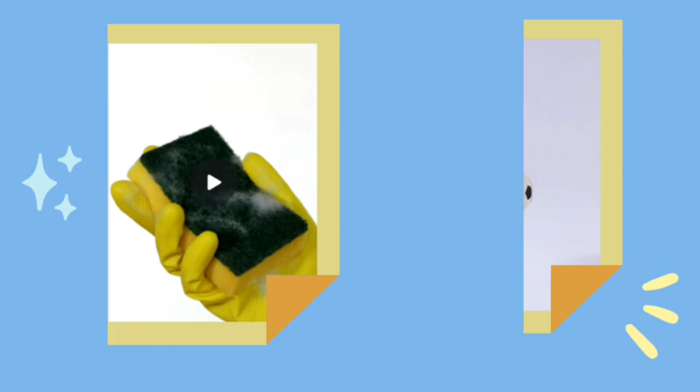Have you ever wondered how some materials can be both soft and strong at the same time? Or how engineers design lightweight structures that can survive a strong impact and still return to their original shape? Imagine this: you fall off a bicycle, your helmet protects you, but after that one crash, it's useless. What if we could create materials that don't just protect us, but also bounce back and can be reused?

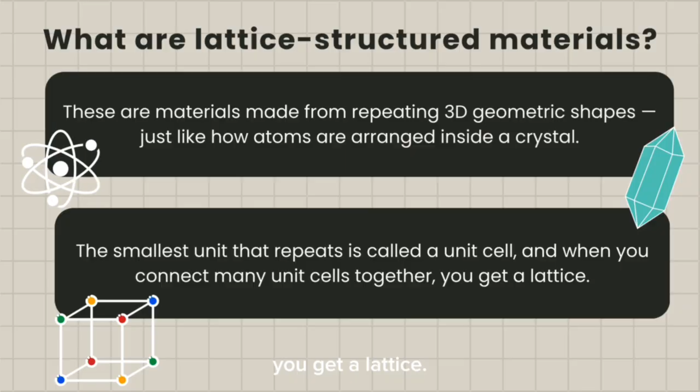So what are lattice-structured materials? These are materials made from repeating 3D geometric shapes, just like how atoms are arranged inside a crystal. The smallest unit that repeats is called a unit cell, and when you connect many unit cells together, you get a lattice. These lattice structures are not only lightweight and strong, but they also have interesting behaviors under stress, especially when heated or compressed.

That's why they are widely used in protective gear, packaging, and aerospace parts. In this study, scientists tested different 3D printed lattice designs made from soft materials to see how well they can absorb impact energy and return to shape after compression. Throughout this video, I will take you through their process, findings, and how this study brings our theory from PHY 535 into the real world.

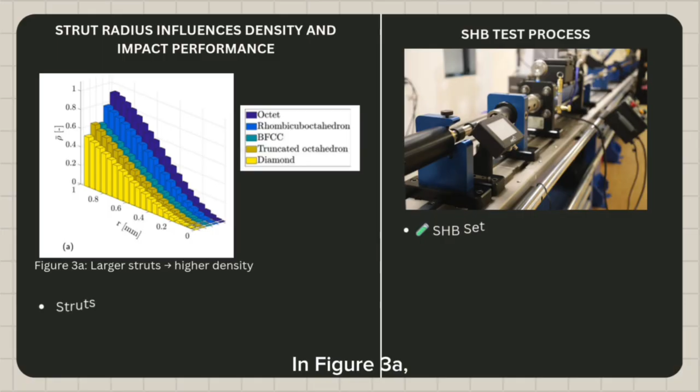The researchers tested 5 different 3D printed lattice designs, each made from a soft TPU-like resin using SLA printing. To compare their strength and energy absorption, they printed each structure in 3 relative densities: 0.2, 0.3, and 0.4. Instead of changing the size of the structure, they adjusted the strut radius, which changes how much material is inside the unit cell. In figure 3a, we can see that as the strut radius increases, the relative density also increases. This allowed the researchers to control material usage while keeping the overall shape the same.

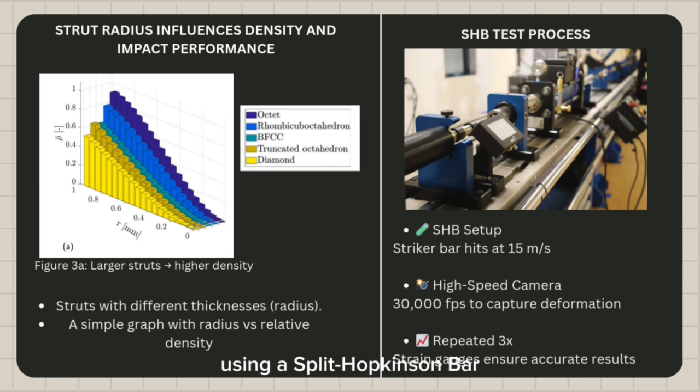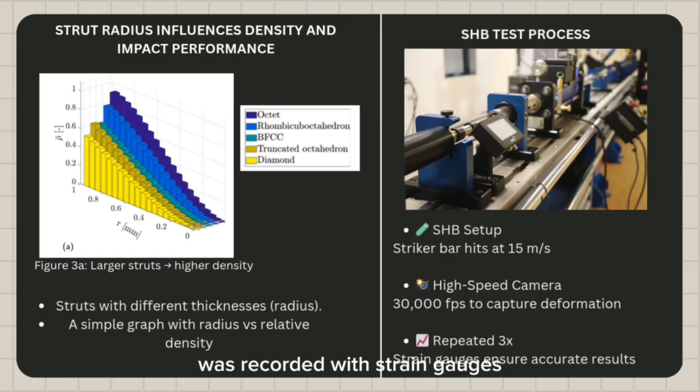To simulate real impact, the printed samples were tested using a split Hopkinson bar, or SHB, setup. The striker bar hit the samples at a speed of 15 meters per second, compressing them up to 80%. The impact response was recorded with strain gauges and a high-speed camera at 30,000 frames per second. Each test was repeated 3 times to ensure consistent results.

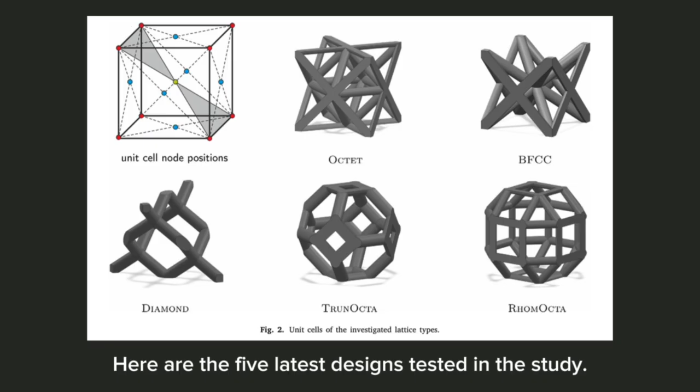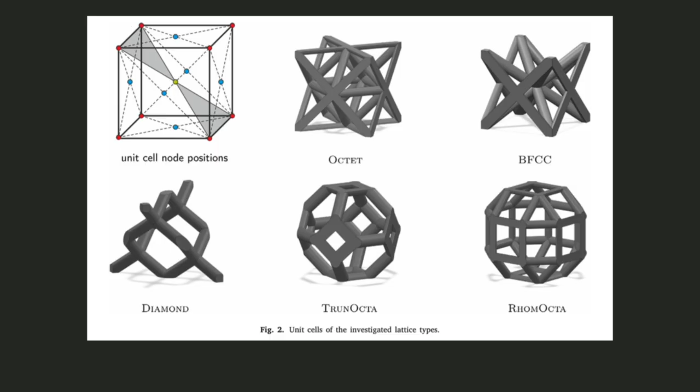Here are the 5 lattice designs tested in the study. All of them are built using 3x3x3 unit cells, and their shapes are inspired by real crystal structures that we learned in PHY 535. For example, the octet is based on an FCC-like structure, while diamond mimics the carbon atom structure in crystals. In figure 2, you can see the unit cells of each design. These repeating units form the full lattice, and their internal geometry plays a major role in how the material behaves under impact. This variety of shapes helps researchers study how different geometries affect strength, flexibility, and energy absorption.

Two key parameters in this study were relative density and the Maxwell number. Relative density, written as ρ, tells us how much material is inside the structure compared to a solid block. The researchers tested all designs at 3 densities, 0.2, 0.3, and 0.4, and controlled it by changing the strut radius, which you can find in table 2.

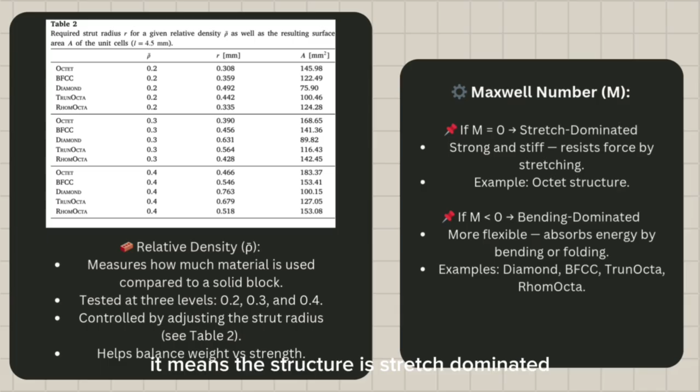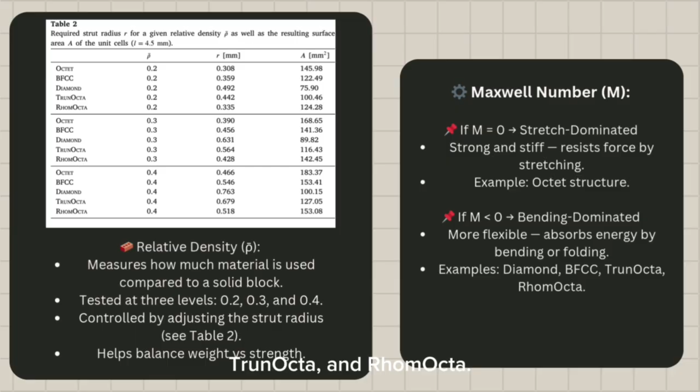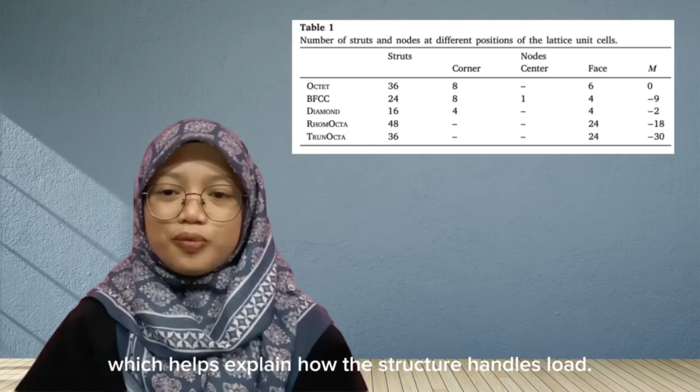The Maxwell number, labeled M, tells us how the structure behaves when force is applied. If M equals 0, it means the structure is stretch dominated, like the octet. But if M is less than 0, it's bending dominated, which means it absorbs energy by folding or flexing, like diamond, BFCC, TrunOcta, and RhomOcta. In table 1, we can also see the number of struts and nodes for each unit cell, which helps explain how the structure handles load. More nodes can mean more complexity in force distribution.

Let's now look at how the impact tests were conducted. The researchers used a modified version of the split Hopkinson pressure bar, or SHPB, shown here in figure 5. In the experiment, a metal striker bar was launched at a speed of 15 meters per second toward the sample, which was placed between two bars. This impact generated stress waves that traveled through the sample. The setup included strain gauges to measure how the stress moves through the sample and a high-speed camera capturing the deformation at 30,000 frames per second.

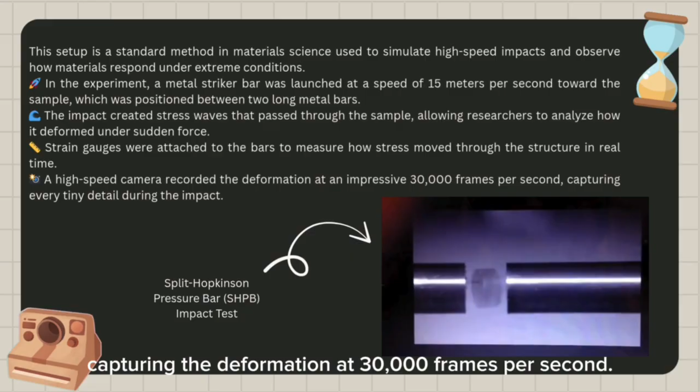Each sample was compressed by up to 80%, and the test was repeated 3 times for each of the 5 lattice designs across all 3 density levels. This allowed the researchers to collect accurate data about energy absorption and reversibility strain behavior during impact. As you can see in figure 5, this setup allows us to measure what happens when a sudden force is applied, helping us understand which lattice structures perform best.

Now, let's take a look at how the lattice structures behave when hit with high-speed impact. The samples were compressed by up to 80%, which is quite extreme. But the key question was: can these materials bounce back to their original shape after being squashed that much? The researchers used a high-speed camera running at 30,000 frames per second to capture the full deformation process in real time. Let's look at some of the results.

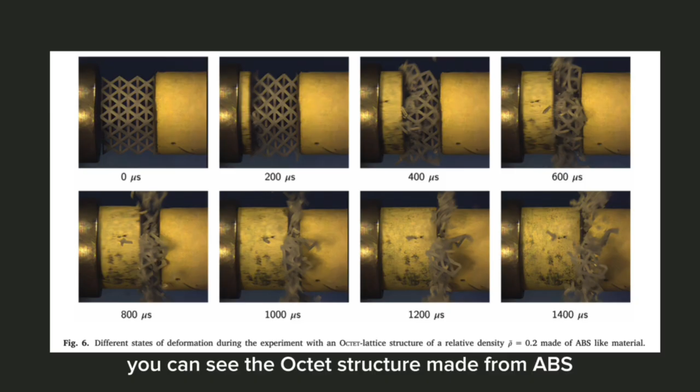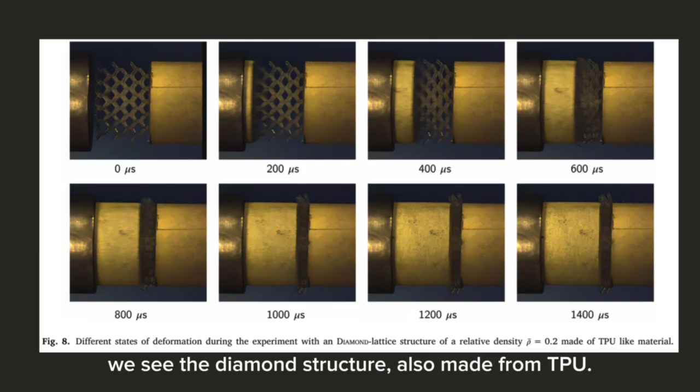In figure 8, we see the diamond structure, also made from TPU. As you can see in the images, even after being heavily compressed, the TPU lattices were able to recover almost fully to their original shape. This proves that these materials can be reused after impact, unlike typical foams or plastics that break or stay deformed.

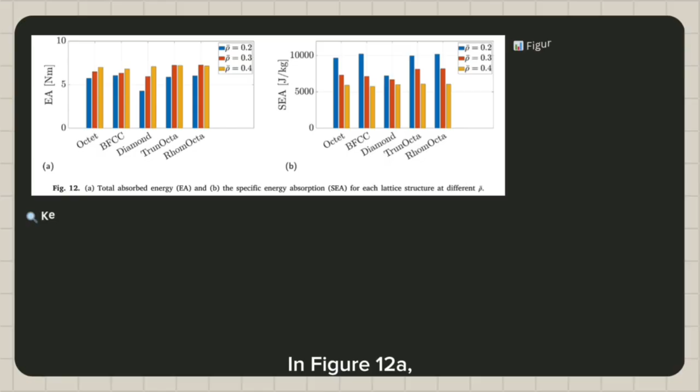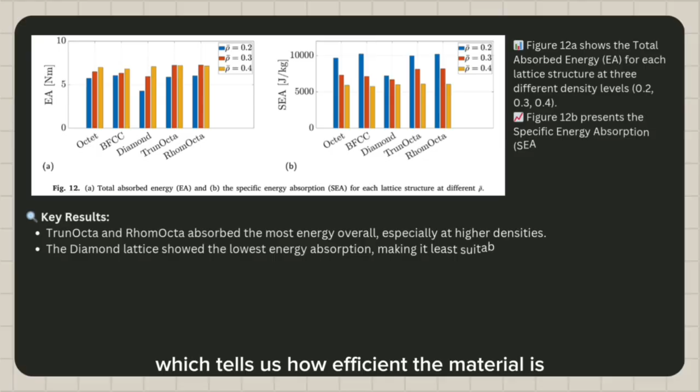The experiment shows that geometry and soft materials will get reversible protection, which is exactly what we want in reusable safety gear or packaging. Let's now look at how much energy each lattice structure absorbed during the impact test. This is one of the most important results of the study. In figure 12a, we can see the total absorbed energy for each lattice type across the 3 density levels. In figure 12b, we see the specific energy absorption, which tells us how efficient the material is, basically how much energy it absorbs per unit of its mass.

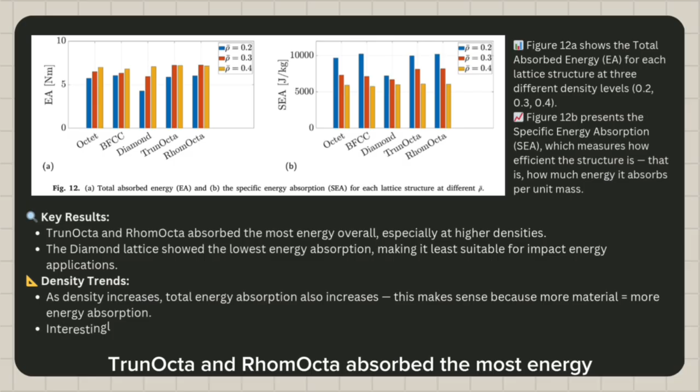The results are clear. TrunOcta and RhomOcta absorb the most energy overall, especially at higher densities. The diamond lattice consistently showed the lowest energy absorption, making it the least effective for this application.

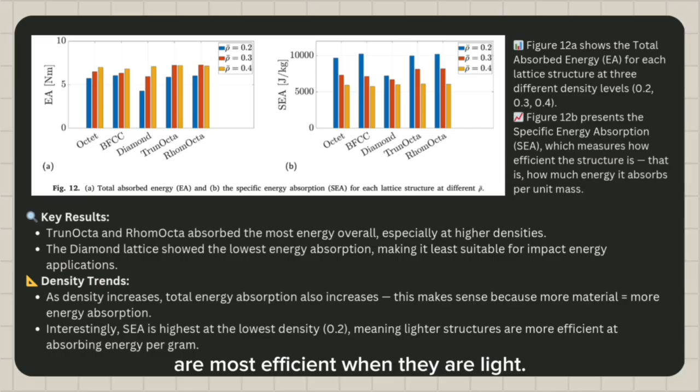We also see a pattern: as density increases, the total energy absorption goes up, which makes sense because there's more material to absorb the force. But interestingly, the SEA is highest at the lowest density, 0.2, meaning these structures are most efficient when they are light. This is important in real-world design. If you want lightweight protective gear, like in aerospace or wearable equipment, you want materials that give you high performance with low weight. TrunOcta and RhomOcta are clearly the best options for that.

So in short, the shape of the lattice matters more than the material itself. Choosing the right geometry can greatly improve how much energy a material can absorb during a crash.

Aside from just measuring energy and deformation, the researchers also analyzed the frequency of the shock waves that pass through each lattice during impact. They did this using a method called fast Fourier transform, or FFT, which takes a time signal like the force of the impact and converts it into a frequency spectrum. This helps us understand what kinds of vibrations are being transmitted or absorbed by the structure.

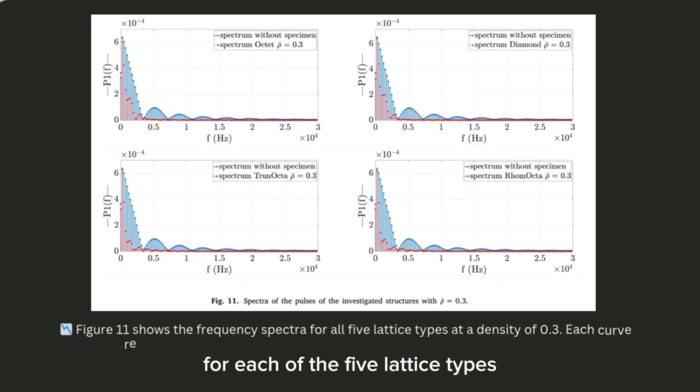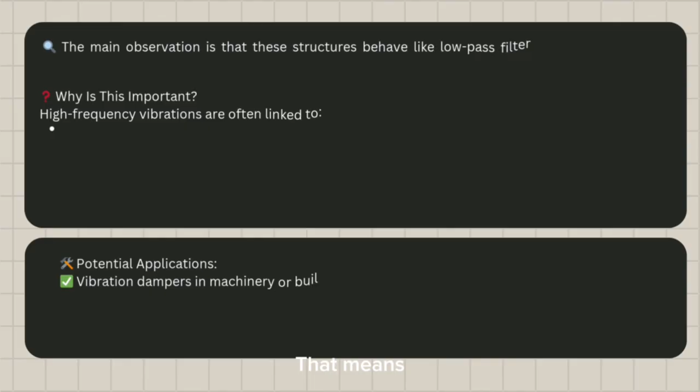In figure 11, we can see the frequency spectra for each of the 5 lattice types at a density of 0.3. Each curve shows how much energy is present at each frequency. The main finding here is that the lattice structures act like low-pass filters. That means they allow low-frequency waves to pass through but block high-frequency vibrations.

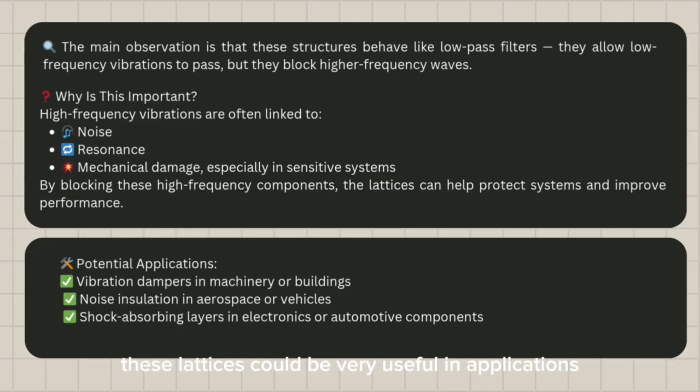Why does that matter? Because high-frequency vibrations are often linked to noise, resonance, and even damage in sensitive systems. By filtering them out, these lattices could be very useful in applications like vibration dampers, noise insulation, and shock-absorbing materials for electronics or vehicles. So this result shows that the benefit of lattice structures isn't just in absorbing force. They can also help control how vibrations spread, making them even more valuable for protective and mechanical systems.

Besides physical testing, the researchers also used computer simulations to study how lattices behave during impact. This method is called finite element analysis, or FEA, and it was done using the software Abaqus. FEA allows us to model a complex structure, apply forces to it, and observe how it behaves, even in ways we can't directly see in experiments.

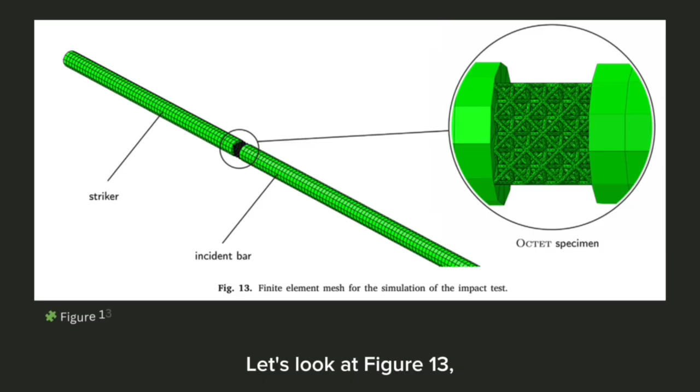Let's look at figure 13, which shows the finite element mesh used for the simulation. You can see the octet structure broken into many small elements. These elements are used to calculate how the material deforms under stress.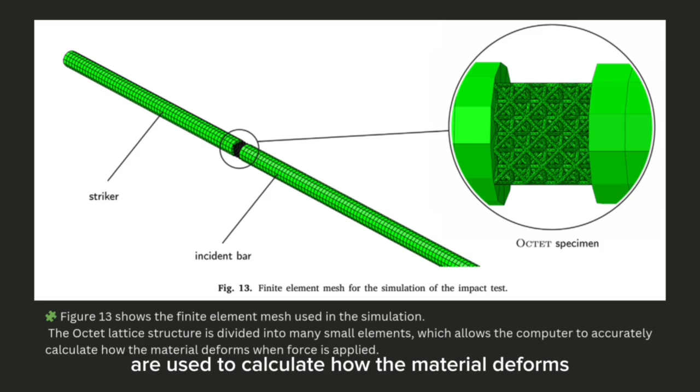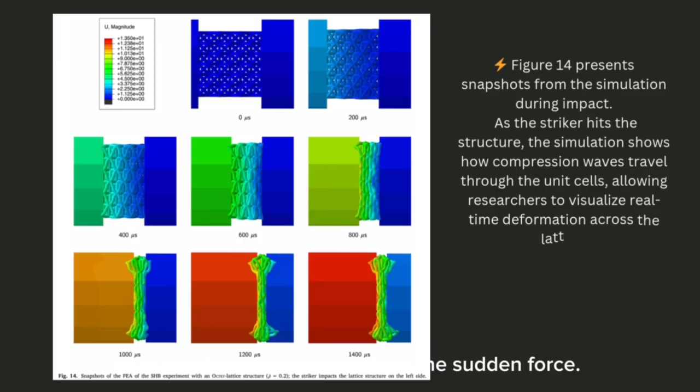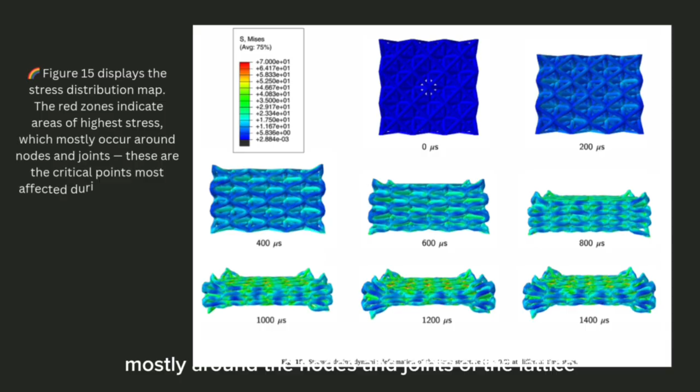In figure 14, we see snapshots from the simulation as the striker impacts the structure. It shows how the compression spreads through the unit cells and how the structure reacts to the sudden force. Then, in figure 15, we get a stress distribution map. The red zones show high stress, mostly around the nodes and joints of the lattice. These are the areas most affected during impact.

The simulation results match well with the experimental data, confirming the accuracy of the physical test and helping to visualize internal stresses that are hard to measure directly. However, the authors mentioned that these simulations are very computationally expensive, meaning they require a lot of time and processing power, especially for dynamic problems like this. So, while FEA is a powerful tool, it's best used alongside physical testing for full understanding.

To conclude this presentation, let's look at what we have learned from this research. First, the geometry of a lattice has a huge impact on how well it absorbs energy. Even though all the samples were made from the same material and printed the same way, their performance was very different just because of the shape of the unit cell.

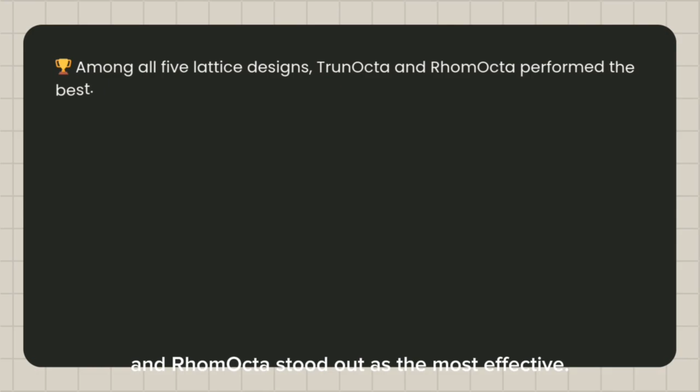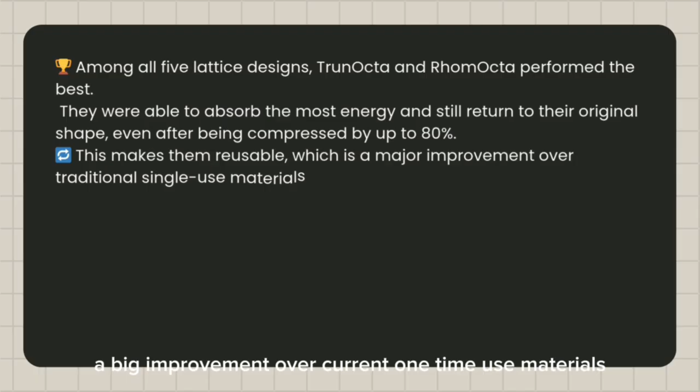Among all 5 designs, TrunOcta and RhomOcta stood out as the most effective. They were able to absorb the most energy and still bounce back to their original shape, even after being compressed up to 80%. That makes them reusable, a big improvement over current one-time use materials like foams.

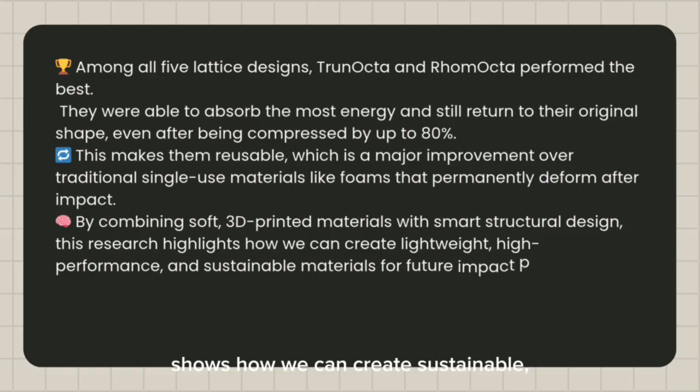The use of soft 3D printed materials combined with smart design shows how we can create sustainable, lightweight, and high-performing materials for impact protection. Finally, this research is a perfect example of how the theories we learn in PHY 535, like lattice structures, bases, and unit cells, are applied in real-world engineering and material science. These concepts are not just academic, they are essential for creating the next generation of protective and structural materials.